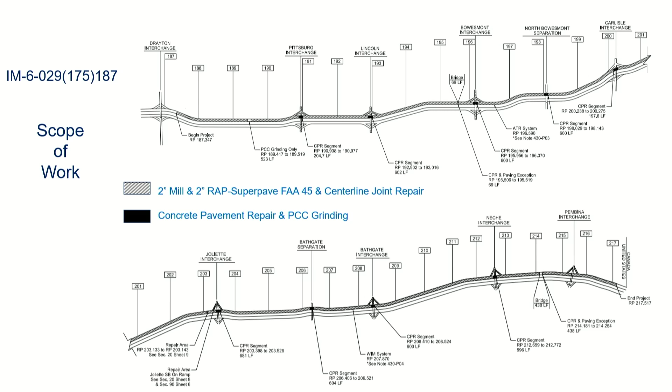For the first part of my presentation, I'd like to focus on a project we did in the Grand Forks District this year on I-29. It started from Drayton to the Canadian border, about 30 miles southbound. The prime contractor was Knife River Materials, and the project engineer was Lynette Stain from the Grand Forks District.

It was mainly a 2-inch mill and overlay, but there were some other things on it as well, like concrete pavement repair and PCC grinding under the interchanges. We also had some centerline joint repair, which we're going to see in a couple of slides. There were several special provisions on this project too.

Longitudinal joint density is in pretty much all of them now, but there's also e-ticketing mandatory and paver-mounted thermal profile, percent within limits. And then there was a ride specification as well, and intelligent compaction.

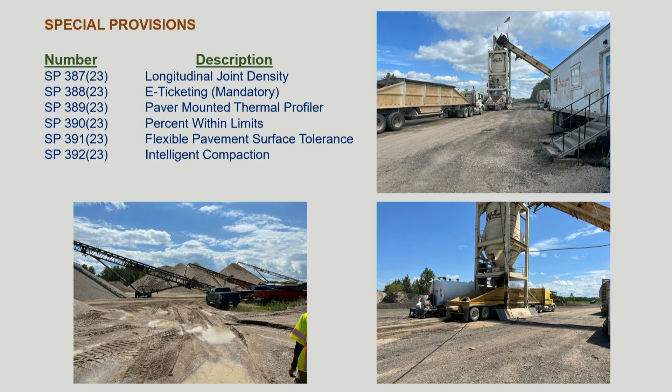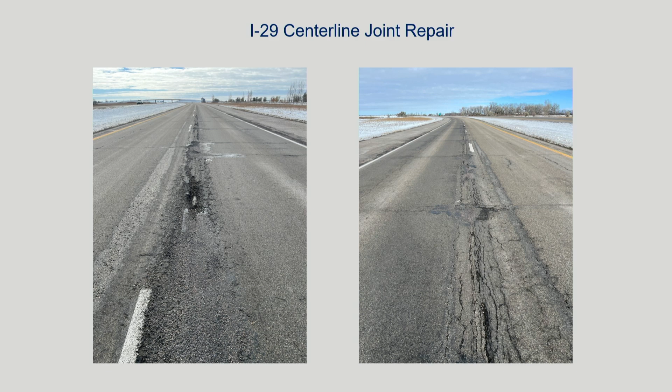This is what the roadway looked like a couple months before we started working on the project. It's pretty obvious we need a mill and overlay, but we also had some real issues with the centerline joint repair, and it's pretty evident there.

It actually has 4 inches of existing asphalt over the jointed concrete. And you can see over to the left that the joint had deteriorated 4 inches down—you can actually see the concrete there. Out of the 30 miles, there was probably about 10 miles that had this issue.

So we really couldn't ignore it, we had to fix it. And of course, that's always easier said than done. You want to be able to do it safely so traffic can keep going, and safety for the workers as well. So we had to be a little creative and innovative as we did this.

This is really nothing new to the DOT. Actually, Valley City has done a couple of projects with this type of repair. So we got the idea from them, and then there's several other states that have done this as well.

You can see up on the top section there, this is where you see the distressed area. The first thing we did was mill off the passing lane, but we went 2 feet more past the center line so we could work in there. Once we did that, the contractor went in and milled out the rest of the joint area, which was 2 feet on each side. Then subsequently, we put the overlay on.

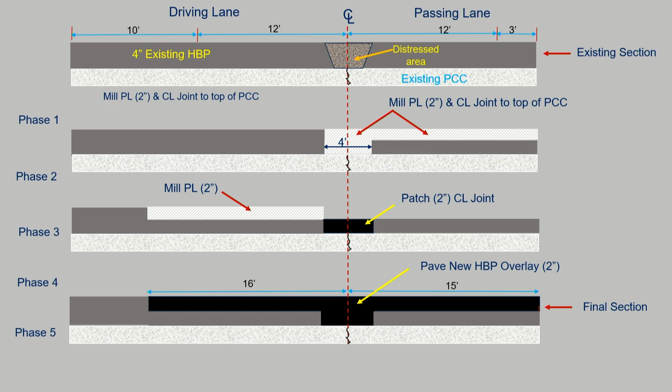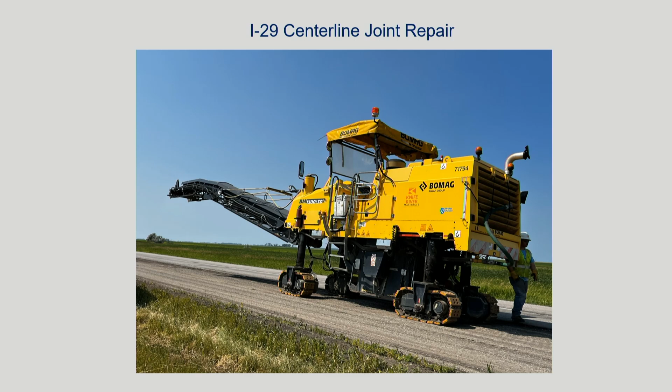So we actually had specified density on the patch area as well. Let me show you a couple pictures of it. This was the milling machine that the contractor used—it was just a smaller machine, and it cut a swath about 4 feet there, all the way down to the concrete on the left.

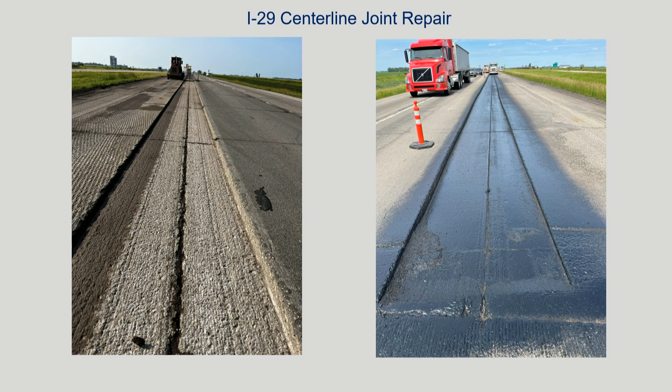And you can see the joint there after it's been done. Actually, the joint was in pretty decent shape, which was kind of surprising. So once it got swept out, they tacked it, and then they went ahead and paved it.

Visiting other projects this was on, and talking with other states, I think this was really the first time I've seen it where they actually used a paver and were able to block off enough so the screed only did for like 4 feet. So I thought that was pretty interesting.

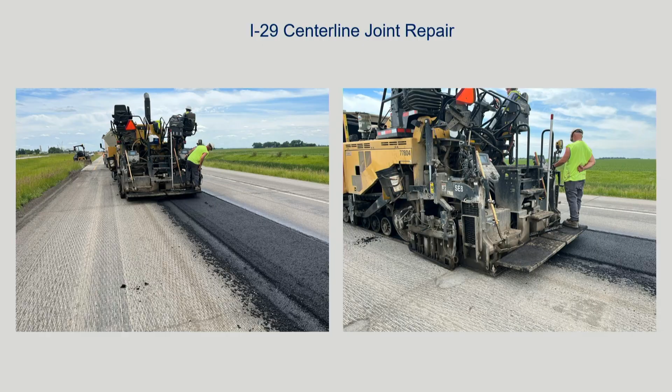It's pretty conventional, it can be done. The regular rolling sequence had a smaller roller in the forefront here, and that was basically the finished product there. So hopefully we get a lot of good out of that.

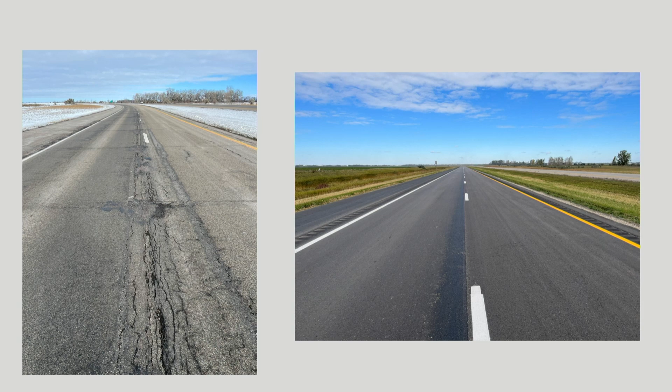So moving on, percent within limits. This is just a continuation of the North Dakota DOT's effort to get better densities and more uniform pavements out there. And so we had this percent within limits specification.

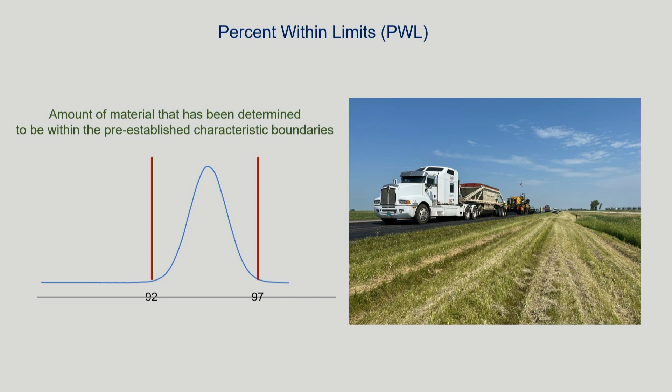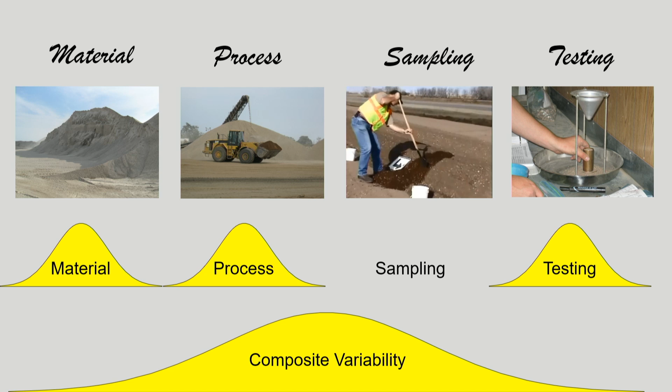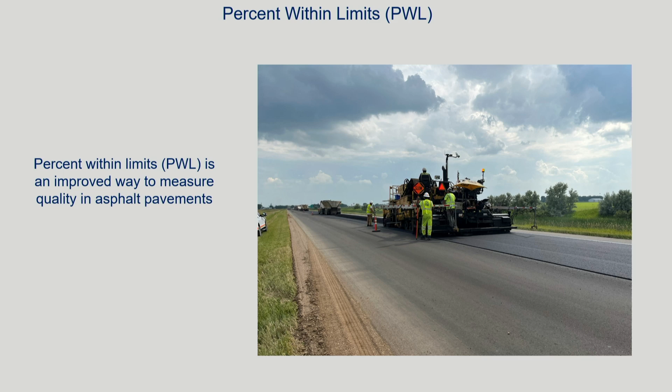With everything, we have inherent variability out there, especially with highway materials. It basically starts at the source and moves in when we process the aggregates, and then also with the sampling and testing. There's inherent variability, but the key is to be able to minimize it and manage it as we go. So percent within limits is an improved way to measure the quality of the pavement.

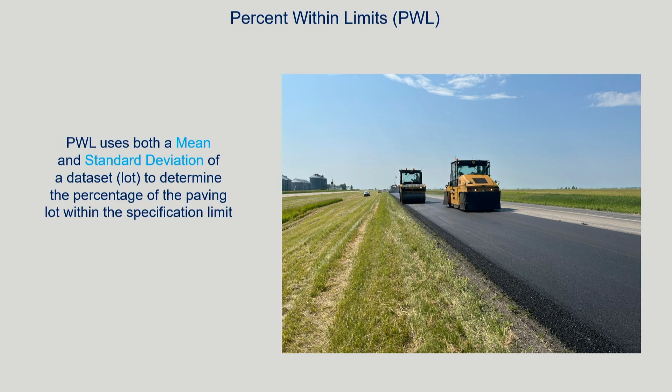Not only do you get the average density out there, you actually get a standard deviation as well. So they really take that seriously as far as the average and the standard deviation, because you can have your hand in hot water and the other one in cold, and you say the average is warm, but you never really got any samples in the warm portion. So that's kind of an extreme, but that's kind of how what they want is a real tight variability out there, where things are more uniform.

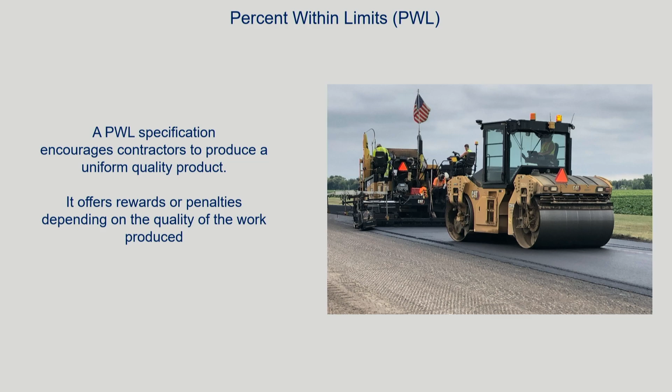So really the PWL specification encourages uniformity when they're producing the mix. So this is the final page of the special provision. If some of you might be familiar with this, we've had maybe a dozen of these projects over the past few years, but the final page is actually the calculations, and they're all statistical calculations, but actually they're really not too bad. So all of this is actually keyed into the paving workbook, but it's kind of nice once in a while to go through it to see where the dollars and cents all come about.

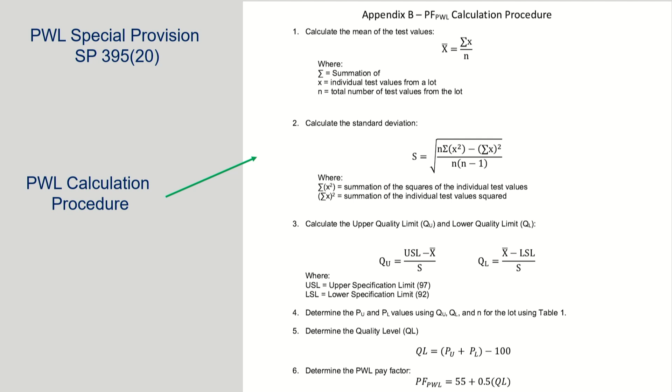So I'm just going to go through one real quick here. So this particular day, there were 7 cores taken. So the first thing you actually do at the end of the day is run it through an average, and 94.9 - take notice of the range there. That's no more than about 1.5%, if that, between the high and the low there. So that's really, I think, pretty good, real good.

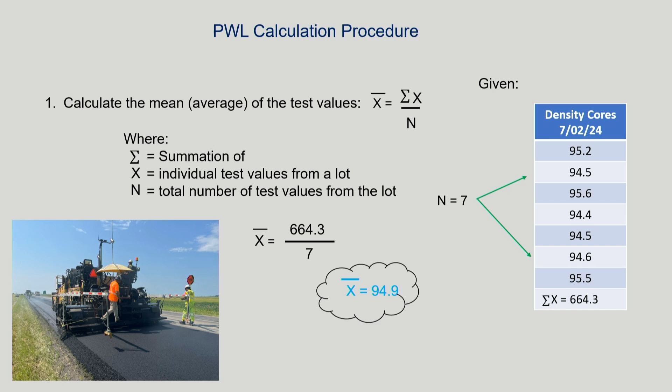So once you get that, then you can go ahead and do the standard deviation, which was also a really good number there. And you take those two values, and then you can figure out your upper quality limit and your lower quality limit. Our lower specification limit for this was 92, and the upper was 97. So the idea here is to really get all your stuff to fall in that area.

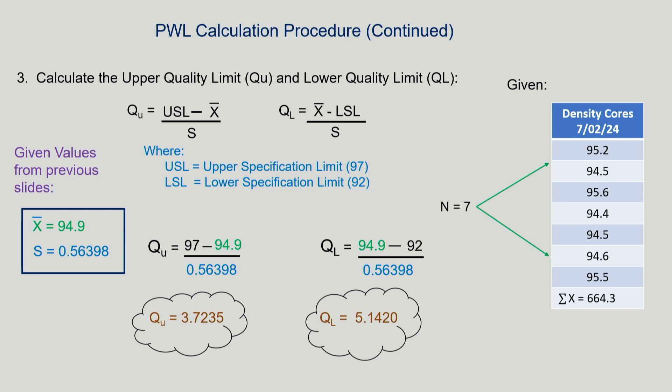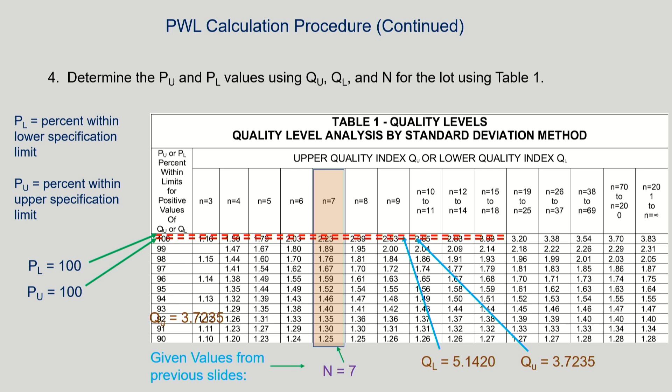And so you get those two values, and then you can plot them on a standard PWL table. And what you get from that is like your percent within the lower specification limit, which was 92, and this percent within the upper one, which is 97. And then you can figure out the last calculation procedure in the upper right there, which is just figuring out your quality level. And the higher the better for that.

So then once you get that number, you can plug it into the North Dakota DOT pay factor for PWL. So in this case, that for that particular day was 105 we got, so that's actually a 5% incentive, which is the best you can get.

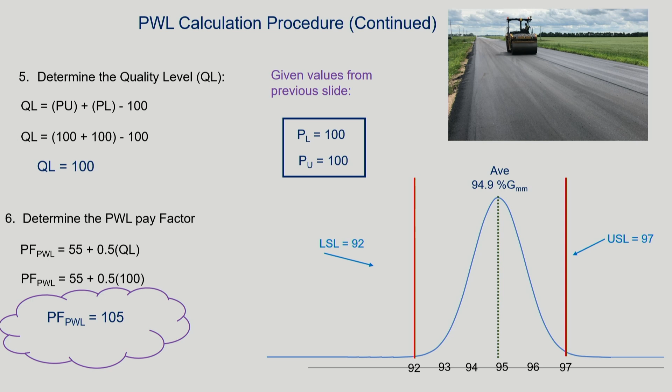Overall, the project had 134 cores on it. There was average density 94.4. There was only 2 cores that were under 92, and the lowest one was 90.8.

And so actually with this type of specification, the contractors are encouraged to push their averages over to the right, away from the 92. If you're too close to the minimum, then with the variability, the curve there runs a chance of being out. So it's nice to get your averages over almost in the middle of the two limits, so you can get everything to come in pretty well.

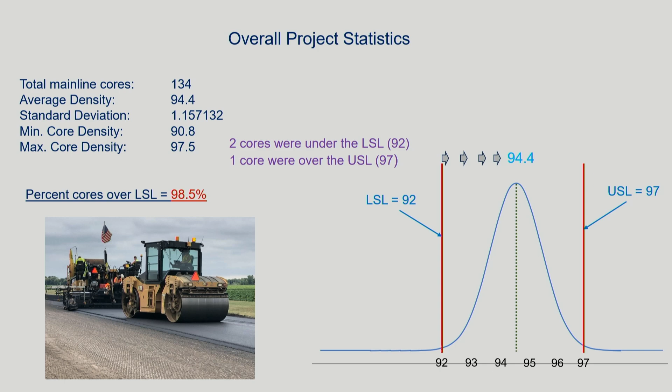So now we'll kind of switch gears a little bit with some of the technology tools we have out there today. We've been using some of these tools now for a few years on not all projects, but several projects over the state. So the first one's intelligent compaction, and that's really just equipment-based technology that helps in the quality control of the asphalt pavement.

And so you have GPS equipped rollers that collect data real time on projects, and they collect data like - how many passes it took. So if you have a square foot of pavement out there, by the time it's all done rolling and compacted, you have a lot of history on it. Actually, you can tell how many times it went over with a roller, what type of roller went over it, whether they had vibratory controls or regular, just static.

It'll even differentiate between what roller went on it. If you have 3 or 4 rollers, it can differentiate between that, and it tells you what time it went over.

Also the surface temperature, it records that as it goes over as well - speed, amplitude, frequency. So there's a lot of things you can get. We know a lot more about our pavements than we used to, because we have a lot of data on everything.

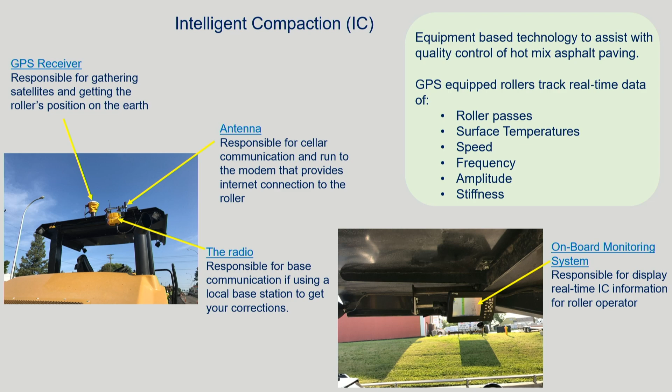There's onboard monitoring systems so that the contractor or the operator can actually use it as a guide to see how many passes they do or what the temperature is as they're going.

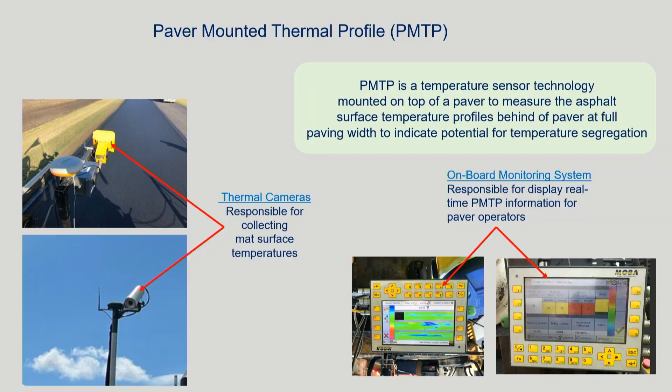We also have paver thermal profile out there as well, and that's more of a paver-based technology. It has infrared cameras, and as the paver goes through, it scans full width all day long, so it gives you a surface temperature profile, as well as potential for segregation - material segregation, thermal segregation, things of that nature. And it also has onboard monitoring systems as well that can be on the paver so the operators can watch it, and that's basically real time as well.

And also density profile system. That wasn't a special provision, but North Dakota DOT has been experimenting with this technology for several years now, and actively comes out and has collected a lot of data on quite a few projects over the course of a few years here. It's basically ground penetrating radar that's full coverage, and it's non-destructive. So it's really a testing alternative to evaluate compaction versus your cores and your nuclear density machines and things like that. They're basically spot tests, but this is actually full coverage, so that's the advantage of it.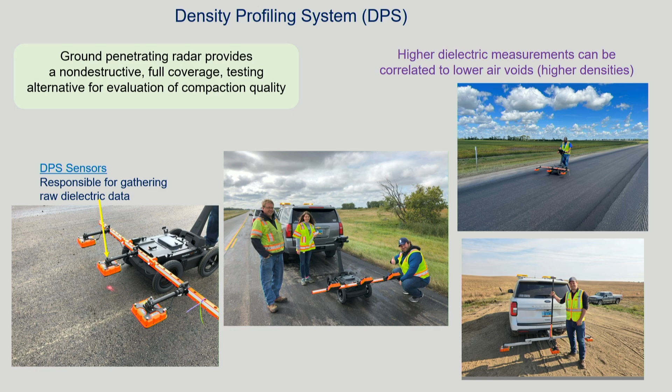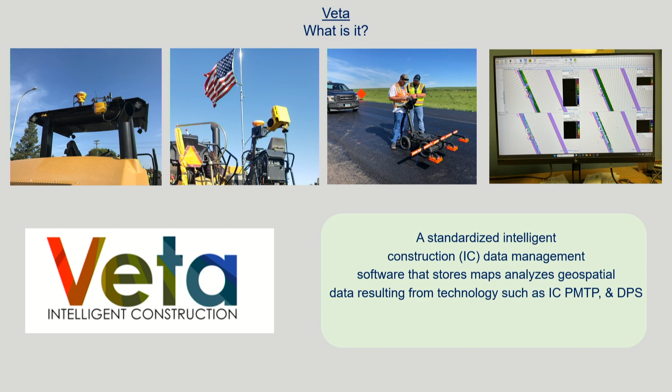So more on that a little bit. All these 3 technologies that we just talked about can actually be analyzed and mapped in a software called Veta, and Veta's been around for maybe about 10 years, and it keeps being developed as it goes. It's really just a way to view all this geospatial data.

So a little bit more on that. I've got a few slides I wanted to talk about where we actually put the technologies all together in one slide to kind of see some things. This is still on I-29, where there was one core that was a little bit lower. In fact, it was the lowest one on the job, and it lagged behind the others maybe 3-4%. So you can go in there and do some forensics on it, for instance, and see what really happened with the core.

So over to the left there you have the paver thermal profile, which comes from the paver technology, and over to the right, in the middle, and to the right is actually the roller-based technology from the compactors. So on the left, you can see the core, and you can plot this in Veta as you want, and you can see it actually fell in some really nice temperatures behind the paver. But even in the middle, you can see there's quite a few passes that went over it - in fact, probably more than 8. I didn't have the legend up there high enough, but...

But then if you filter it out a little bit more, where you have just passes over 180 degrees - and 180 degrees is like an arbitrary value that has been agreed upon over the years, that if you try to compact anything under that, you're really not going to get any more results, it's cooled enough where it's not going to really help you any - so you can filter it out to show those temperatures over 180. And you can see that it really only got about 1 or 2 passes. So why would that be?

You can even notice right at the paver stop over to the right, there are no passes. There are no hot passes, so.

Now here's a good core, 95.3. So it fell in some really nice temperatures in the thermal scan. And over there to the right, I just have it filtered out to the passes over 180 degrees, and you can see it fell in some really nice passes there as well.

So over to the left there, you can actually go into this Veta program and do an analysis. Every one of those blue dots there that you see, that's actually when a roller hit it of some sort. It tells you how many minutes since it started rolling, and you can see we count them up there as maybe 11 or 12 passes. So there was actually that many on that area.

So that might be a good reason why that core turned out so good. There's usually a story behind most of it, most of the time.

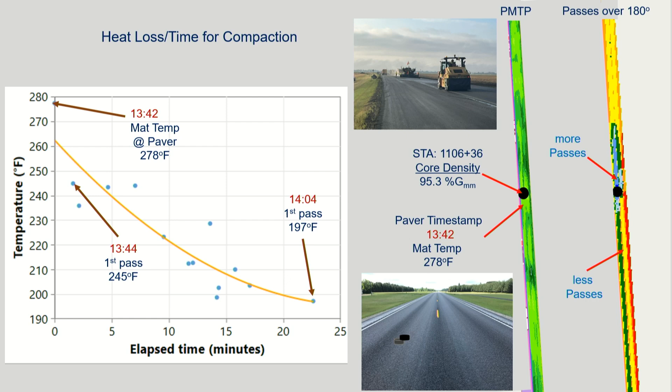Now I took that same data that was just in the previous slide and put it into the PaveCool program. Probably many of you have used that. It's older technology, probably been around before some of this new technology's come along, but it actually plotted it pretty good as well as far as time for compaction after the paver goes over it, within a minute or so.

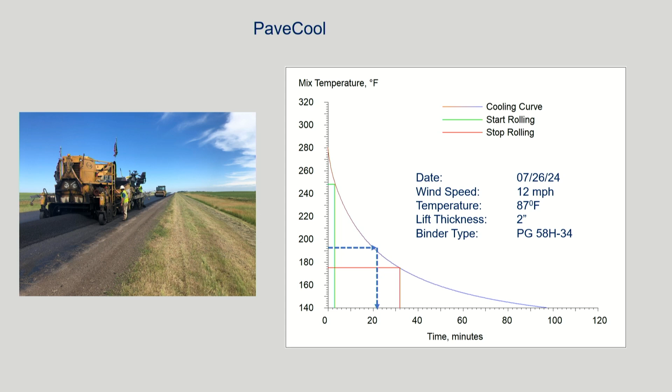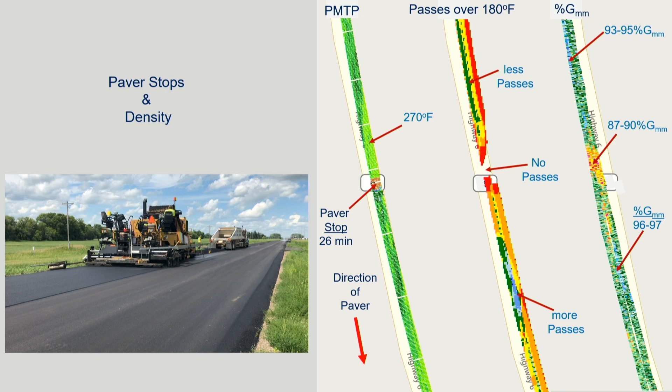Once again, the same thing, basically the same slide here, or same situation. You could even tell where, like in the middle, you have a couple passes there that were kind of left to the left there on the top. It actually reflects that in the density profile system.

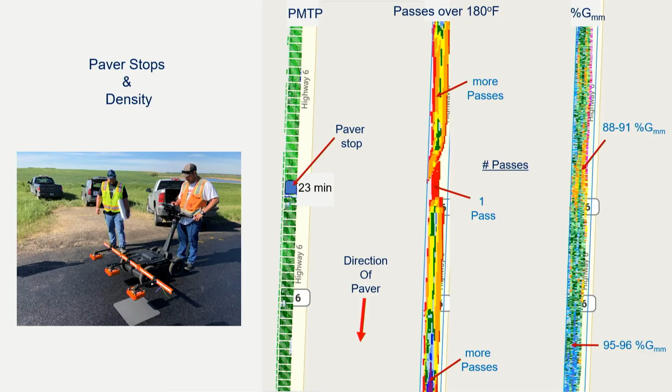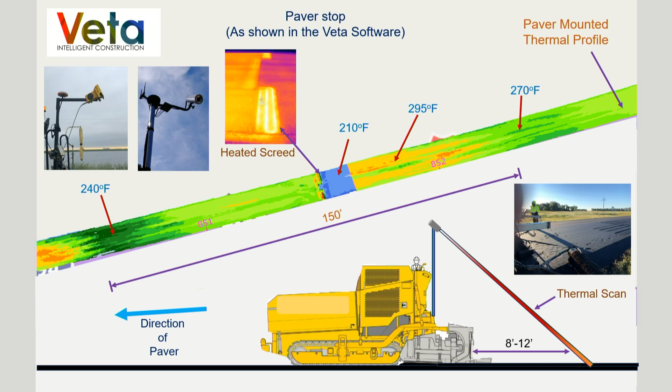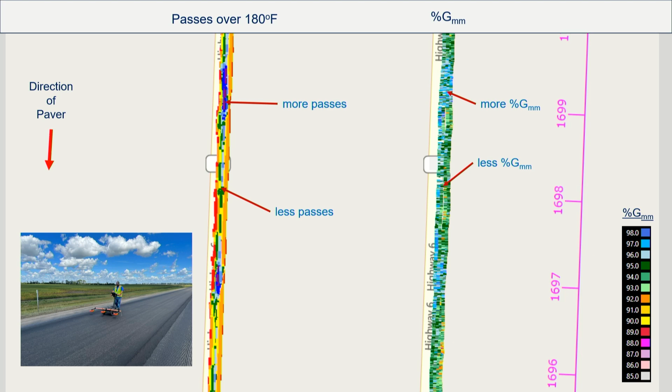Yeah, okay, I got to keep going here. So here's some more passes, just some more things here with the density profile system. You got more passes, less passes. The concentration of the greater densities are in the density profile system there.

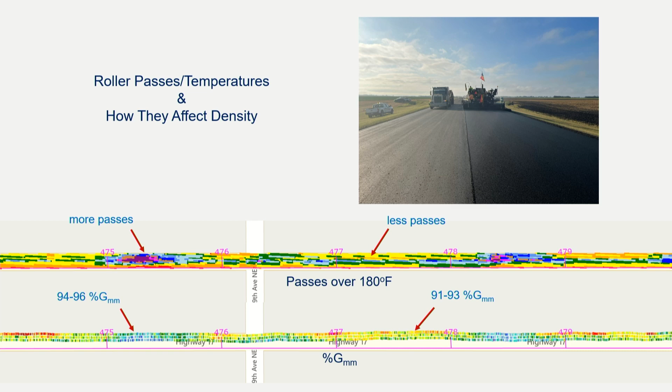Same thing with this as well. More passes, less passes, more density where you have more passes. And this particular screen here actually differentiated between - and you can do this in Veta, you can differentiate between the different temperature or the different densities. So in this case, we'll just take the right there: the lesser densities from 94 down were actually situated in the areas where there was less passes.

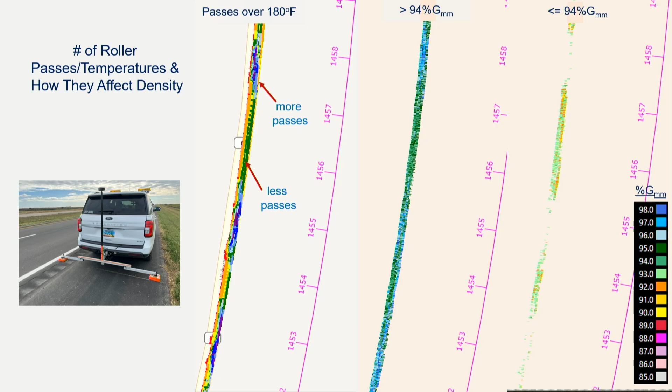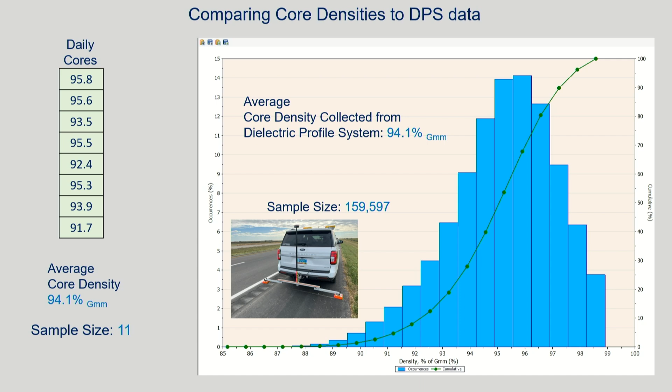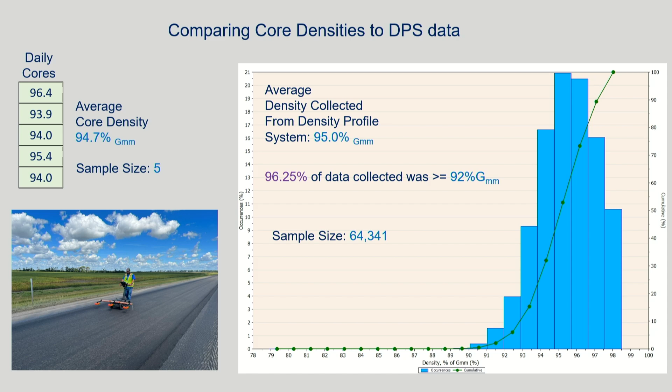You can do some analysis in Veta. We actually did, with the dielectric, or with the profile system there, the density profile system, you can plot all that, and actually we had the densities were actually right up, right average with the cores. And same thing with this. I think we always compare the density profile system to the cores, but I think we should be comparing the cores to the density profile system myself. I think this is the most accurate.

Thermal segregation, if you look at Veta enough, you'll see some places where you see a lot of segregation. It's pretty cyclic. I have a question mark there because I'm not really sure what's actually causing it, maybe some of you do.

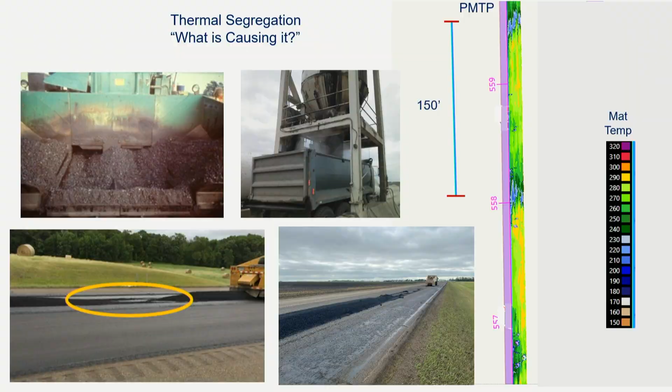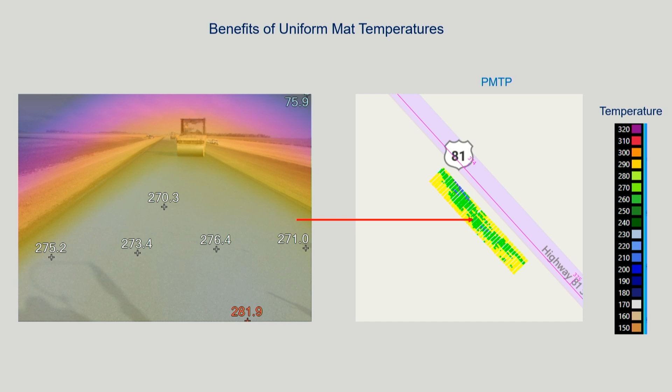Benefits of uniform temperatures - this is just taking a thermal camera with someone in the back of a paver, and you can see there's some really nice temperatures there across. If you can get it to that point, that's really good.

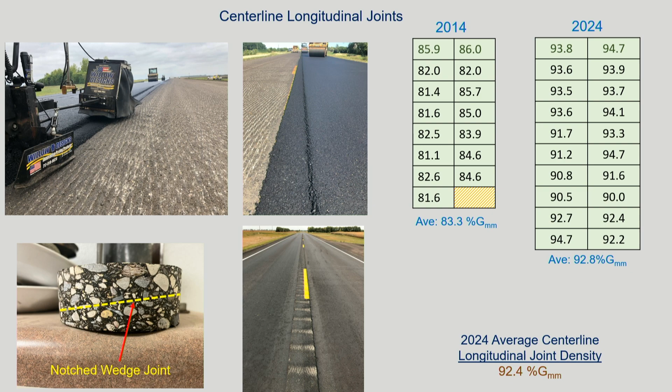Longitudinal joints - we started looking at these about 10 years ago, and at that time we took some information cores when we weren't really doing anything. We couldn't core within a foot of the joint at that time. But you can see that one project was actually 83.3 average, if you can imagine something like that. And now you can pick just about any project, and you're getting 92.8. That was just a typical day of a random project. So I think a lot of people are looking at this now, and there's actually some innovation going on with the notch wedge joint, things of that nature.

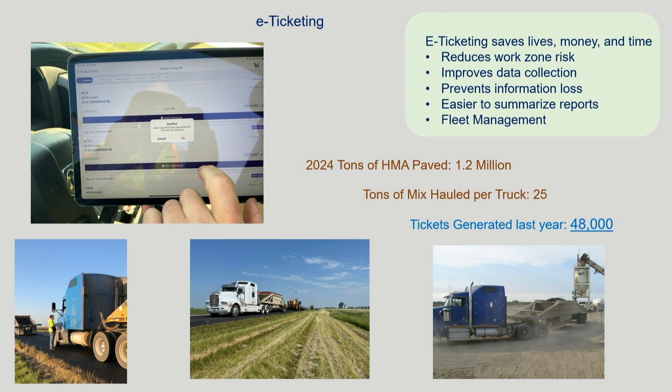E-ticketing, another technology that's come around now. Without any doubt, I think it saves lives, money and time. I think it improves data collection and reduces information loss. So last year we had 1.2 million tons at, say, an average of 25 tons per truck. You'd get maybe 48,000 tickets we would have had to deal with - either lose some, or when you're transferring data over, you might lose some of that. So I think this is a win-win. It really helps the contractor make their flow rates and cycle times more efficient by using this technology as well.

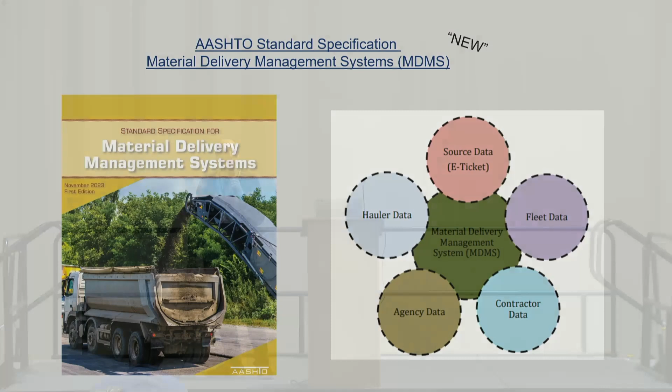There's a new standard out there, just wanted to let you know - it was just approved by AASHTO. It's called Material Delivery Management System. MnDOT was the steward, and when the user groups were looking at all this, they decided they wanted a little bit more, so maybe some extra data collected once it leaves the source, or past the e-ticket - looking at stuff like split loads and where all the loads are going, multiple bid items, reconciling quantities. They also added some fields so that they could support groups like labor compliance and civil rights activities and things like that. So it's kind of a grocery store of things out there. E-ticketing is a big part of it, but there's other things too later on down the line.

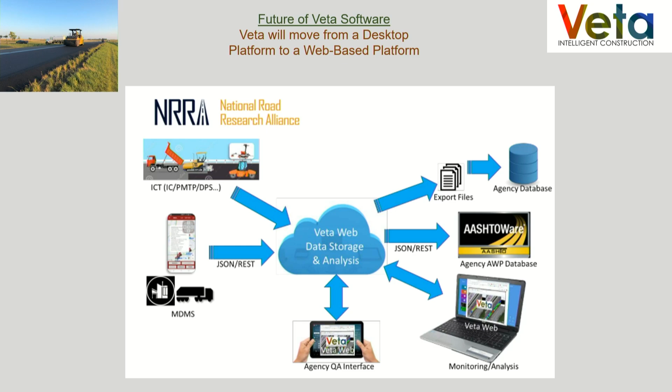So the future of Veta - Veta right now is a desktop platform, mainly for post-construction analysis. It wasn't really intended to be real-time, it kind of left that up to the proprietary softwares. But now it's being moved from that to a web-based platform.

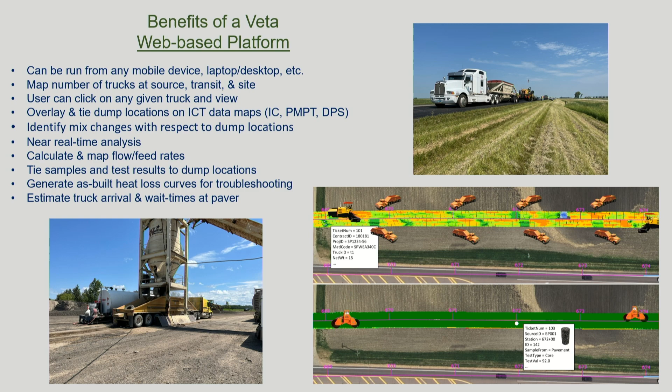I think there's going to be piloting some in MnDOT this year, and it's going to have a lot of new things. In fact, you can even plot all the e-ticketing stuff on it as well, and compare that with all your other technologies. There's a lot of good benefits I think that's going to come from this - being able to run it on your laptop in the field or a mobile phone, and map the number of, keep track of your trucks. I think one of the biggest things I like about it is it's going to be able to work with the near real-time things going on in the field, so you can make some quick decisions with what you come up with.

That's really going to help, because that's what all this is about - that's why all this technology was developed, to help in quality control. So our big goal in all of this, using all this, is to get better performing pavements and longer lasting pavements, and that's the big goal. I think all these technologies, if they're used, can be effective in helping with that. So with that, that's all I've got.

Let's give Curt a round of applause. Oh, thank you. Thank you. Thank you.